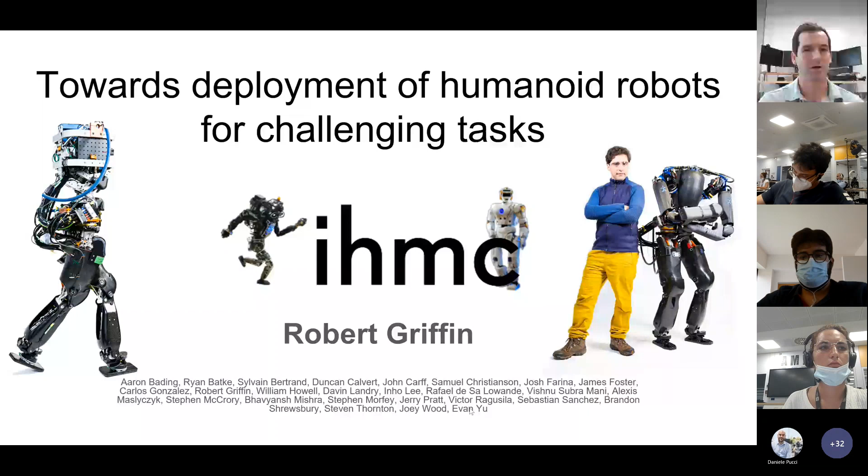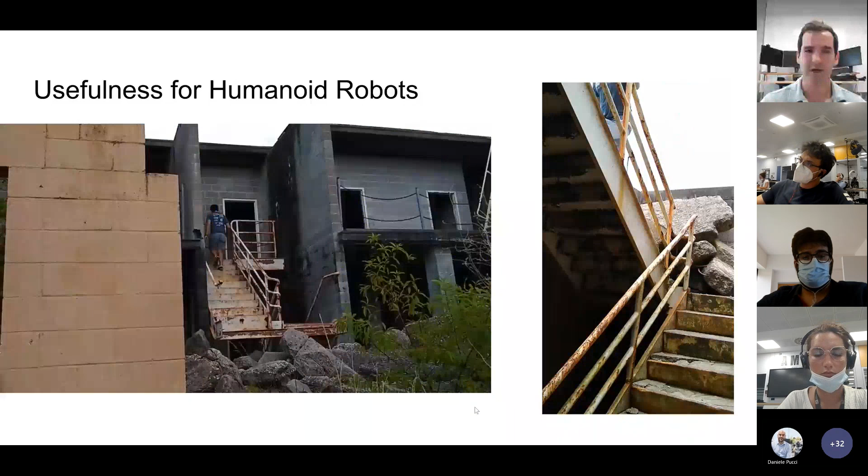I know a lot of you also focus on legged systems, so this justification may not entirely be necessary. But when I think of humanoid robots, I think about what kind of tasks and operating places do we want them to be in. This is me recording, going over rocks and debris at the Camp Lejeune Marine Corps base in North Carolina. We were there for a project with the Army Research Lab a handful of years ago.

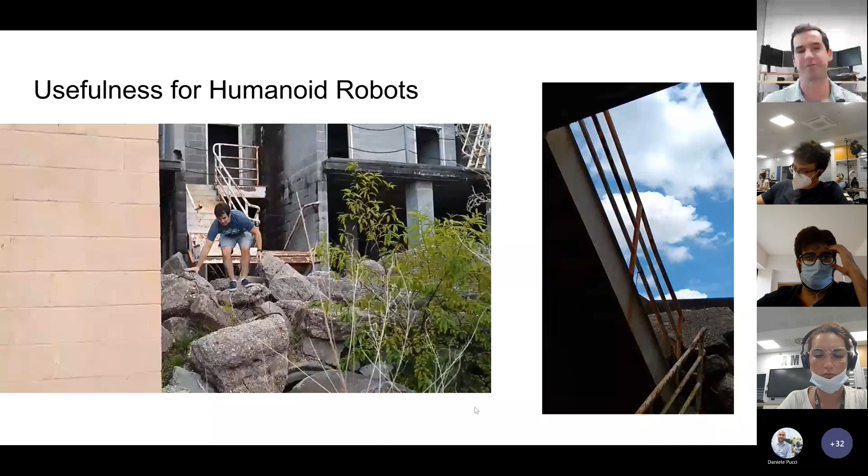I really don't think this is a task that could be accomplished by a ground robot that didn't have legs and hands. Other tasks you can look at - we comically call this a traditional disaster area, which is actually Jerry Pratt's garage. Here the user has to climb over all kinds of different things. You have small support areas incrementally spaced apart. Sometimes they need to use their hands for balance, and there's a lot of these tasks involving retrieving objects.

There's just a lot of these tasks that would be extraordinarily challenging, if not impossible, to accomplish with more traditional ground robotic systems. That's really what we're thinking about - these complex environments in an urban setting where robots have to go through doors, climb stairs and ladders, squeeze through tight spaces like this crawl space in the bottom left, as well as go over rubble and overcome barriers.

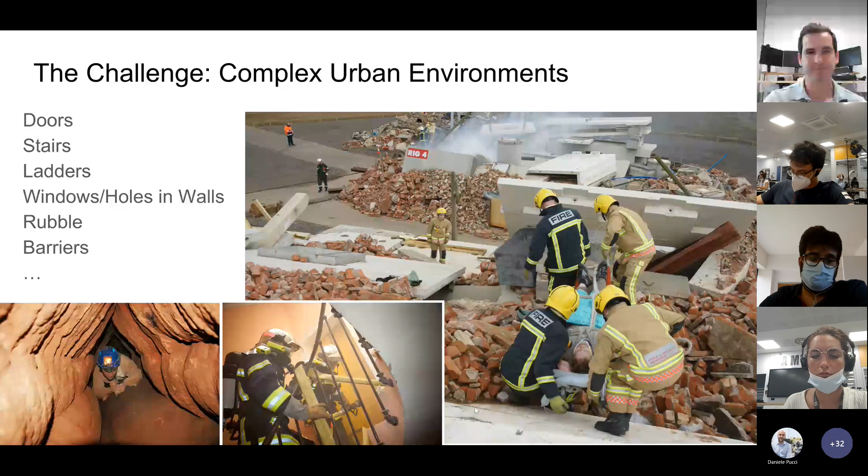And that's our whole thesis statement: humanoid robots can do what people do. I can reach a high object, so can a robot. I can squeeze between tight spaces. I can climb stairs, go over stepping stones, and over obstacles pretty easily. If I compare this to more traditional ground platforms and even quadrupeds, a single platform with two legs is a lot less constrained in terms of the variability it can accomplish.

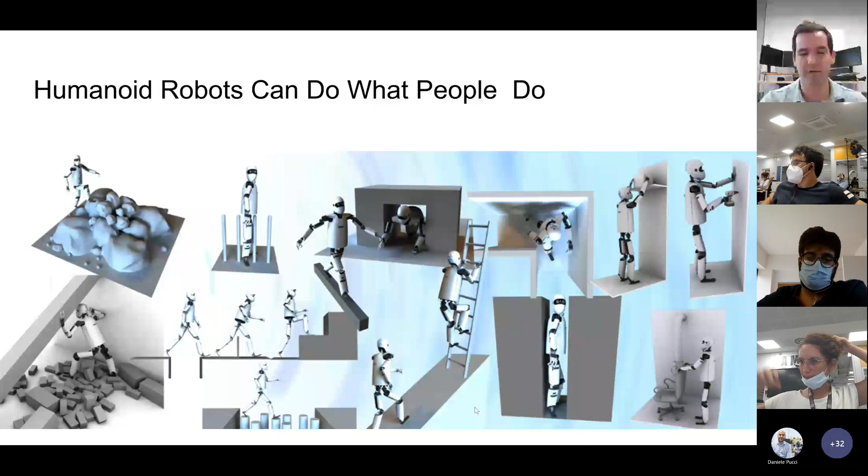Tracked and wheeled bases, looking back at these tasks, couldn't accomplish a lot of them, particularly given a finite size. If I want to go over big obstacles, I need big wheels. If I want to climb stairs, I need big wheels. But if I want to squeeze under something low, I need a small platform. Quadrupeds are still somewhat limited by their form factor, whereas a human has a very different profile if you turn sideways, and your feet only need a place to step about every meter, so you can go over pretty much any terrain.

To that end, we've been trying to design our own new humanoid robot. The biggest reason for this is we really want to operate at a human tempo in relevant environments. For a long time, our research has been really constrained to a lab setting.

I think that is the same for most of us. Although I know people like Claudio in the audience has actually taken his robots out into the real world, much more so than we have. But...

We really want to be able to have robots that are faster, lighter, have this high range of motion, and an equal level of reliability. We've been operating with our Atlas and Valkyrie robots since the DARPA Robotics Challenge, going on nearly 10 years now, which is kind of incredible to think about. We also want to just see, how flexible can we make a platform? How fast and strong can we make this system?

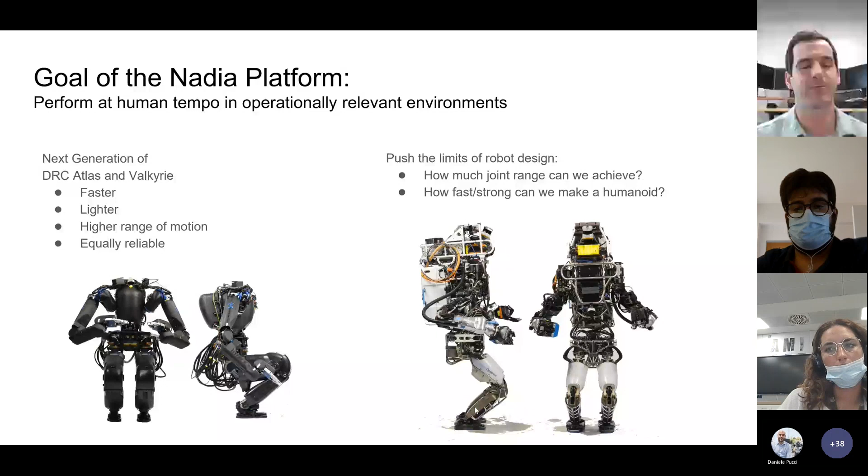To that end, we've spent the last handful of years designing Nadia. We really started exploring designs in 2019 and putting together prototypes. We used this rapid iteration methodology where we wanted to test different joint mechanisms in plastic as opposed to metal, so we didn't have to commit to a design too quickly, because printing or cutting metal is both time consuming and expensive, whereas printing plastic can be done relatively quickly and cheaply, which allows us to iterate fast and test different designs without committing to anything.

So after about 16 versions in 2021, we decided to actually start manufacturing. We found something we were happy with. We started to manufacture the robot, got it assembled around summertime and walking. Then around March of this year, we finished building our upper body, which we attached to the robot here.

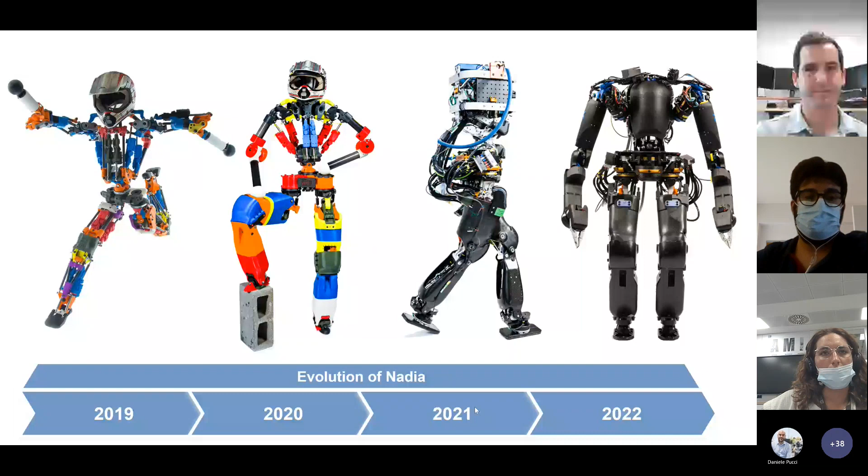So Nadia, as it is now, is kind of this mix between electric and hydraulic actuators. We have 6 degree of freedom legs, 5 of which are hydraulic and 1 electric. Then we have a 3 degree of freedom spine, 2 hydraulic and 1 electric, and then 7 degree of freedom arms, which I'll dive into the design aspects of here in a minute.

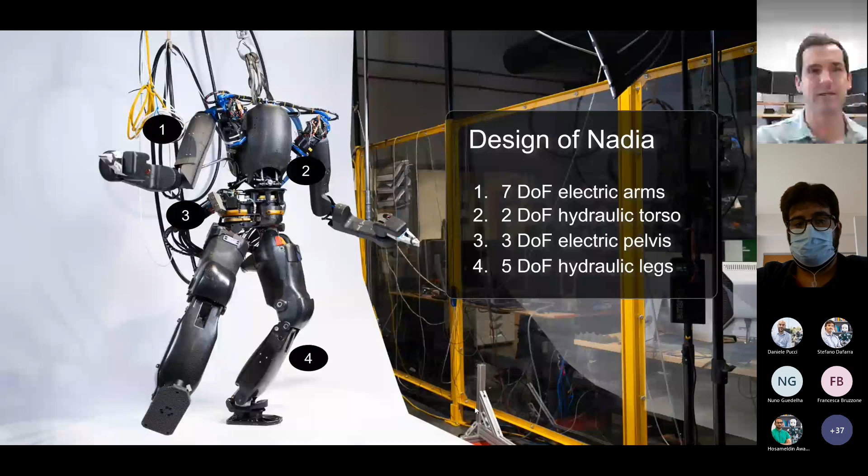Now, one of the big things that we did, apparently right now - for hydraulics, this is the integrated smart actuator developed by Moog, also in collaboration with you all at IIT, specifically the HyQ group. One of the reasons we were really focusing on these hydraulics is there's not an electric actuator that we have found that has the same power density as a hydraulic piston.

It's also nice because instead of having to put all this copper where you want the power, you can move high pressure fluid to where you need it. So you can amortize and recenter where a lot of your mass is. If you put your HPU of your robot into the chest, I then don't need all that weight in the legs. And once I have a good HPU, I've already paid that cost - I can basically use hydraulics throughout the rest of the robot.

So as you can see here, we're really using the same piston or actuator throughout the robot, which has some costs I'll go into later. But we chose that because if you look at these curves, it's the only thing we were able to find that even comes close to hitting the actual power curves of a human being. The best electric we were able to find is this blue line down at the bottom, which doesn't come close to the hydraulics.

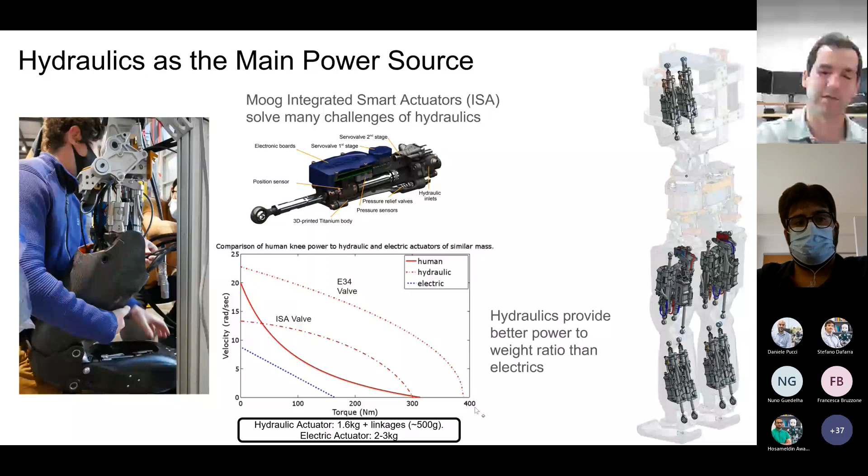We also do this carbon fiber exostructure for the robot. The idea here is you can have this large moment of inertia or modulus of elasticity - I can't exactly remember - but you put all the mass radially out in the carbon fiber, so you get this really stiff link. In addition, it protects all of the internals, as well as potentially allows the robot to make contact with most any part of the body, which is really something humans are capable of.

We have this soft structure that allows those interactions to be done easily, but also, if I can lean against something without using my hands or feet - that's a real direction we think humanoid robots need to push in order to be able to operate in these kind of environments.

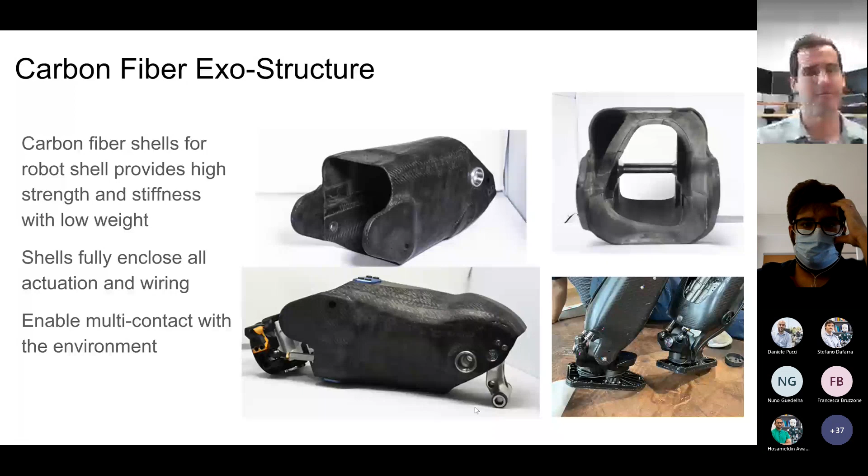We also designed these commercial off-the-shelf arms. This was pretty much - we were running near the end of our project and we needed arms, and this was a quick solution. And it's worked pretty well.

So we have these, we just used T-motors off the shelf and then carbon fiber tubes with a couple of metal cut linkages in there. And with that, we're able to get this long arm as well as a massive workspace due to the range of motion of the joints themselves.

We had looked at using these planetary gear box actuators that we developed for the pelvis, but just the size and expense of them and the time that it took to actually get the gears manufactured was a little bit prohibitive. So we've been using these arms on the robot since then.

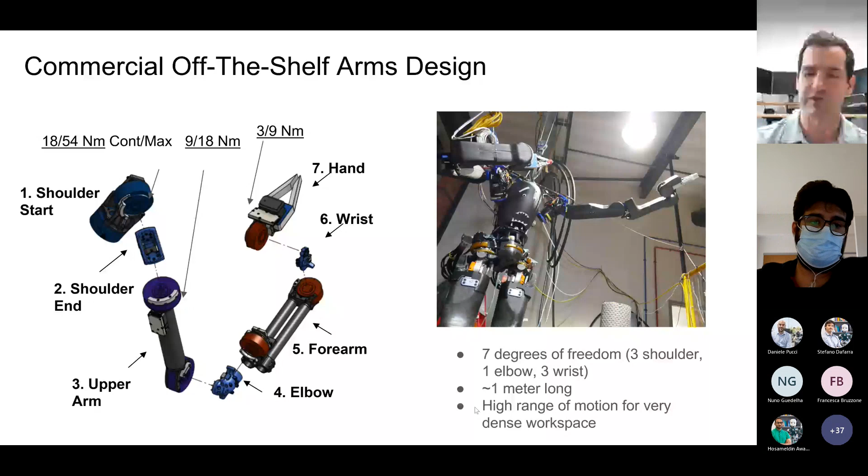With that, we've been able to achieve some, we think, quite great performance when it comes to range of motion. You can see here the robot can lift its knee pretty high, and this isn't really exploring the full range of motion of the pelvis. When humans lift their feet, they're able to tilt their pelvis in order to get this really high range of motion out of it. We're not really doing that here, but we're still able to make really high step ups, as well as the robot can touch the ground pretty easily, and that's without using the spine or bending the pelvis as far forward, like a human would do.

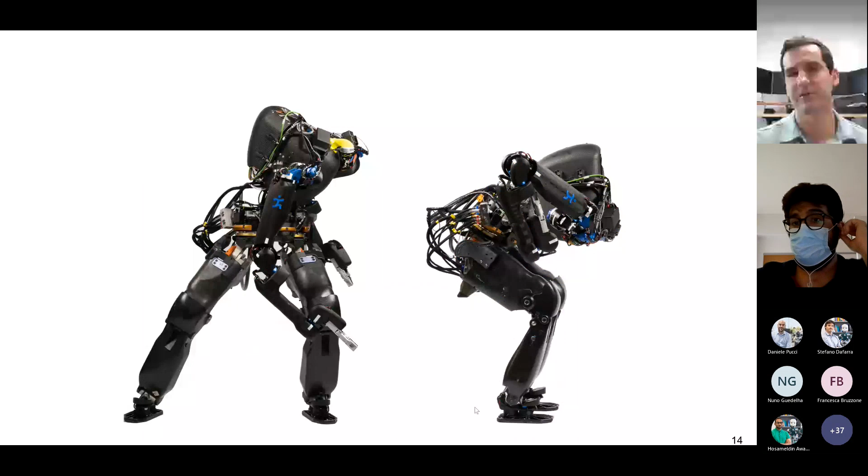We can also do that kind of a lean, as you see here on the right, as well as get really wide stances and move the robot's center of mass around.

Then when we do this kind of comparison to the Atlas robot that we have, you can just see the shoulder height is pretty comparable. The hip height is actually, I think that's not a perfectly scaled image on the top left, but the hip height is slightly higher, and that's because of the size of our hip mechanisms. But because of those hip mechanisms, we're able to get a much wider stance, as well as actually really do crossover steps. Atlas can just barely put its feet one in front of the other, but Nadia can completely cross over, and we think that that's going to open up a lot of possibilities when it comes to step adjustment.

When you compare this height that the robot can actually step up, Nadia is able to step on top of these 4 cinder blocks without really having to cheat. Whereas Atlas here, the cinder blocks are not directly in front of it. It's having to heavily roll the foot outward in order to reach that same foothold.

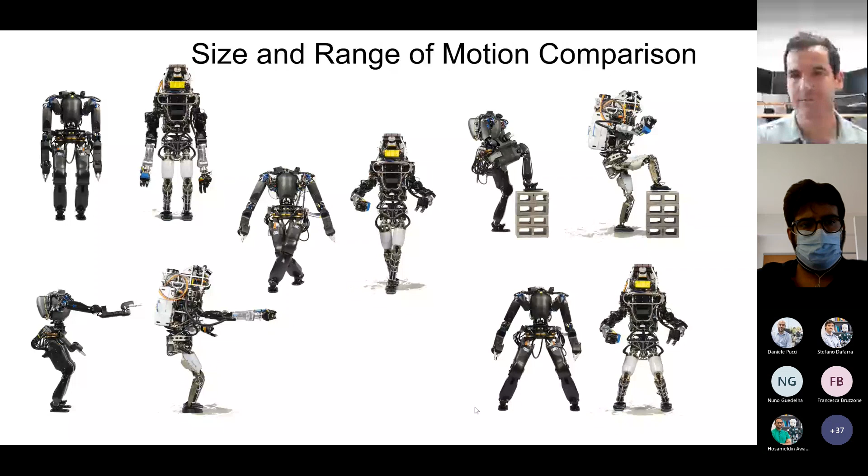And this enables a lot of tasks that the user can directly tell the robot, step here, here, here, here, and it can navigate through these really complex environments. So this is kind of the architecture that we were centering around for Nadia. And this architecture is really based off of using these reduced order template models.

So in this case, we're looking at inverted pendulum dynamics, and specifically this concept of the capture point. If you're not familiar, this basically is saying, okay, well, I think I can model motion of a biped as an inverted pendulum, where you basically have the base of the pendulum is the foot down here at the bottom, and specifically the center of pressure within the foot. Then the end of the pendulum is the center of mass. And then we can assume that it's a point mass, or we can have a reaction mass here to actually generate angular momentum. It doesn't really matter in this case.

But the big assumption is that you assume constant height. So the center of mass is moving in this plane here at some kind of fixed offset from the ground plane, where then the leg's able to extend and retract in length. And when you do this, you can then kind of define this, we call it the instantaneous capture point. It has a couple of other names in the literature, like the divergent component of motion, which has been championed by both the Asimo team as well as the group out of DLR by Johannes Englsberger, as well as the extrapolated center of mass from the biomechanics literature.

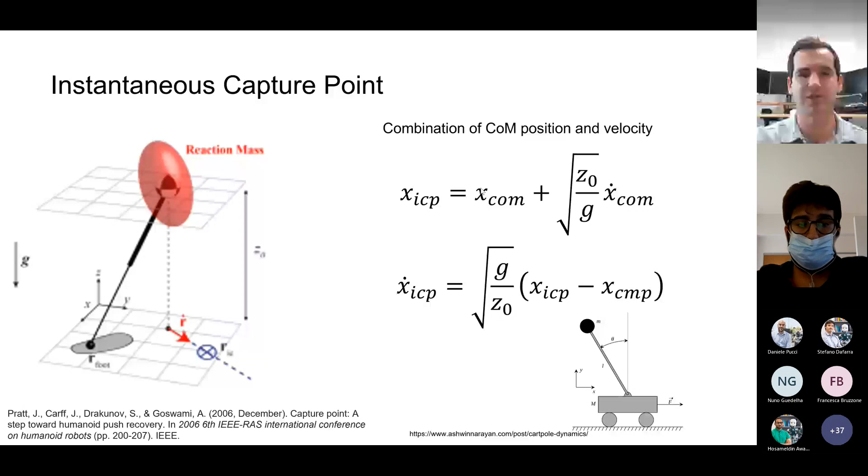The big goal is, we have an operator off screen with a joystick controller. From that joystick controller, we're computing desired footholds in a thread and sending them to our walking controller, and it just assumes a constant velocity. Here the velocity heading is constantly changing, so the plan is constantly changing, but we're able to achieve really good omnidirectional motion, whether it's backwards, forwards, or side-to-side walking.

This has been really great, that we're actually able to start having relatively good locomotion, not incredibly slow like Atlas. Sometimes you'll watch our Atlas and it's moving what appears to be quickly, and then you walk next to it and realize it's depressingly slow. But that's not really the case with Nadia. So that's been pretty exciting to move into that direction.

Kind of the next big thing is we want to build in this kind of dynamic stability to the robot. We don't just want it to be walking with fixed footholds, because that really limits the stability of the overall system.

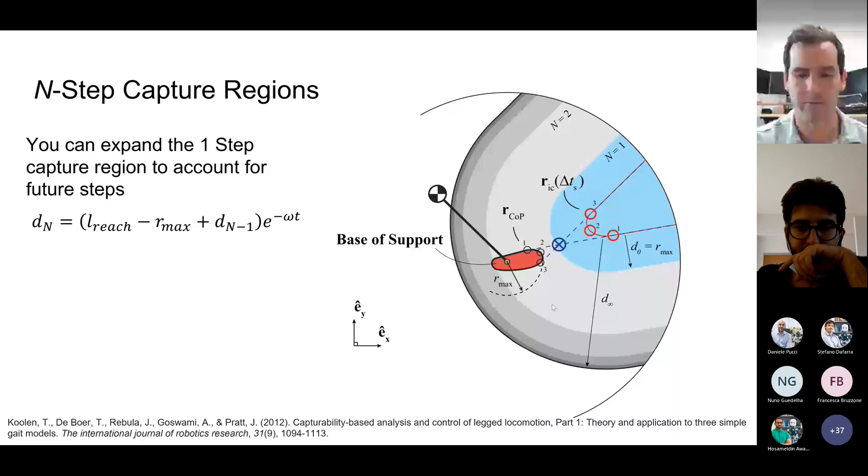One of the underlying assumptions of this, though, is that you can step anywhere within a circle. You see this black circle describing where the robot can step in the world, and that's not true. If this is my right foot, I can't step directly on the other side of my right foot, particularly with a robot like Atlas, but also a robot like Nadia. This means that my reach in this expansion, this underlying equation, is wrong, so I need to take this into account.

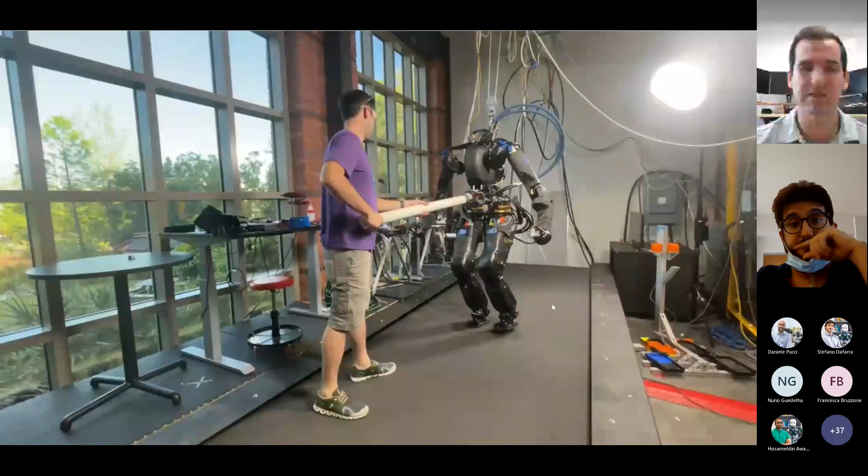You can actually do that by looking at your reachable set and expanding about that. And when you do, the robot, using this capture region approach, gets a pretty robust response. We were pretty happy with this. Here's me pushing on it with a boxing glove attached to a PVC pipe, which is a finely tuned instrument that we developed here.

One of the big challenges about this, though, is I'm having to be really careful when I push the robot. It's really sensitive to the actual timing of the disturbance, just based on a couple of things.

Mainly the fact that if I have this really long transfer duration, if I don't push the robot right at the beginning of swing, I'm probably not going to be able to recover from it well. Even with a 0.5 second swing, if I add just 0.2 seconds of transfer phase, the area of my capture region gets reduced dramatically. That 0.2 of a second is extremely important.

That has to do with the exponential relationship between where the capture point is in time, coming from the inverted pendulum. So I can treat my capture point location as a phase variable and ask where through my dynamic plan I am. If my capture point is at the very beginning of the plan for transfer, my phase variable is at 0. If it's near the very end of the plan, my phase variable is at 1. Somewhere in the middle, it's about 0.5.

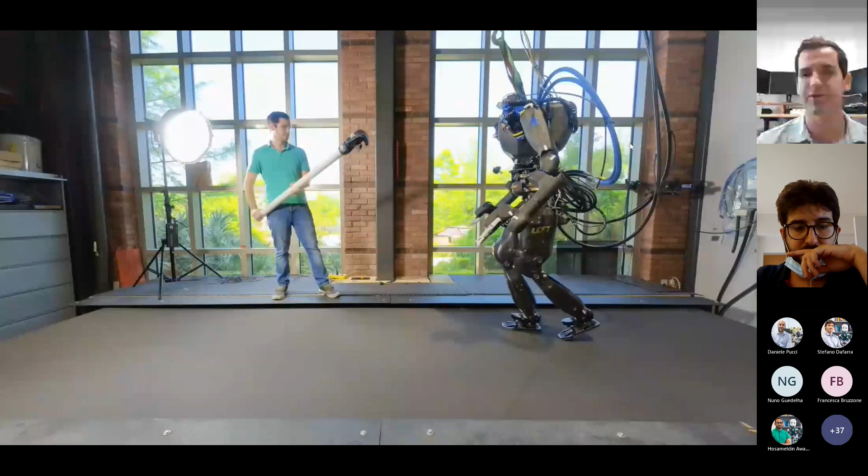When I do this, you're able to get much more robust disturbance handling, where I'm not having to be as careful as to when I'm pushing the robot, because it's able to basically terminate transfer early and then take quick swings as necessary. So it deviates from the prescribed nominal timing as it sees fit based on the capture point conditions, the capture point state.

And this has been really great. I'm able to push the robot relatively hard. It's not incredibly hard, because it still doesn't have knowledge of anticipation. It doesn't know that it's going to get pushed. This is purely reactive behavior. Whereas I think people are really good at leaning into a push that they see coming, this doesn't have that capability. It's having to rely purely on reaction.

One of the next things is, one of the disadvantages of just having the one size of SEA actuator that we have is that we have these really heavy legs on the robot. We have all this mass in the shins, which means you have all this distal angular momentum. It's completely oversized. We get about 900 Newton meters of torque at the ankles, which is incredible but also completely unnecessary. Because of that, we can't just treat it purely as a point mass, because we're swinging these feet relatively quickly through the world.

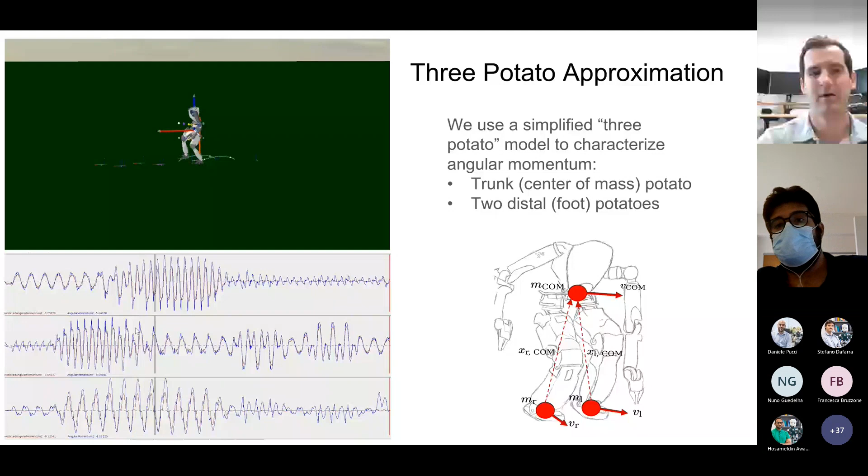To address this, we can use the 3 potato model, where you have the trunk, which is 1 potato, and then you have these 2 foot potatoes that have a small amount of mass in them. One of the problems with this is it's not incredibly accurate. If you look at this plot here, you can see that the blue lines are the actual angular momentum of the system, and the black lines are the estimated one from this 3 potato model.

So there's a lot of nuance of the angular momentum that the 3 potato model misses. To compensate for that, one of the things we're looking at is to actually learn a residual model. So take this data - we have a really accurate estimate of the angular momentum itself, we know the foothold, we know the leg trajectory - what would the resulting angular momentum actually be? Then you can learn that delta to make the 3 potato model predict correctly what the actual angular momentum of the system is going to be.

In this case, you still have the underlying parameterization of the 3 potatoes, so you're just learning that residual. We're pretty excited about getting this to work. On the robot, we've noticed a few issues we're still trying to iron out, but I think this is a good path forward for a lot of it, because it really does make the correction correct, whereas it was qualitatively close but not quantitatively. Now it is both qualitatively and quantitatively accurate.

One of the other big things we've been pushing into is thinking about multi-contact. We've been designing operator interfaces to allow a user to both specify contacts in the world that the robot has, as well as manipulate the body through different poses in that configuration.

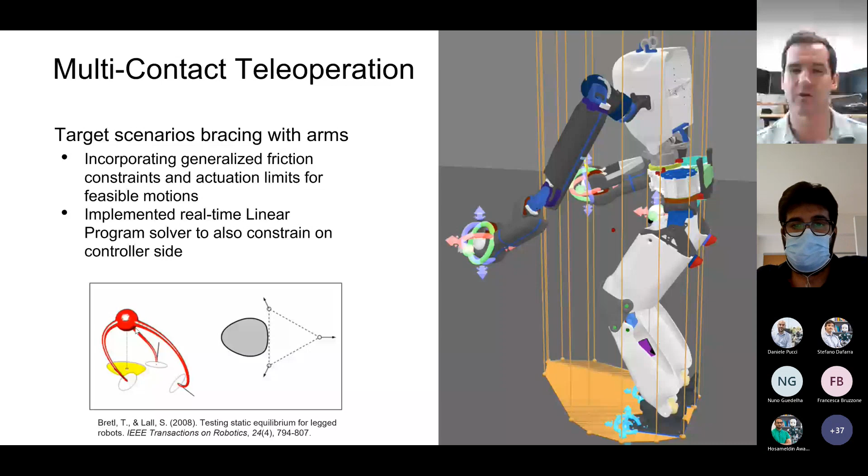In doing this, we can load from a JSON file and manipulate the robot, and you can see what it's capable of doing. This really opens up a lot of the advantages of a humanoid, and the fact that the robot can now lean much further forward to reach objects that would otherwise be completely inaccessible, really improving that workspace.

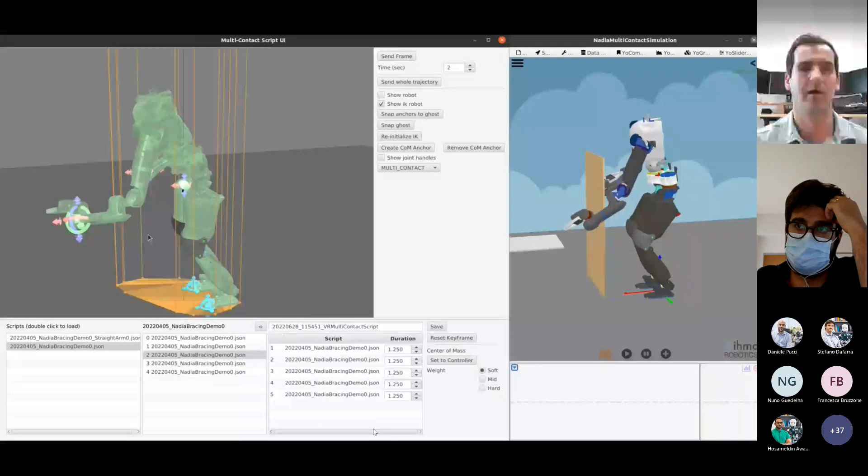The workspace in Nadia is great with the arm as it is, but you have this floating base, you should use it. One of the other big areas of work we've been working on is adding this kind of user-driven automation to the robotic system. This comes out of our work in the DARPA Robotics Challenge.

In there, we came in second in that challenge, and we had an hour to accomplish relatively basic tasks. You can see here the breakdown of that hour, where the robot was only moving 35% of the time. The rest was spent with the operator figuring out the exact commands to send it, trying to localize in the world where the robot is, getting situational awareness to direct the platform correctly.

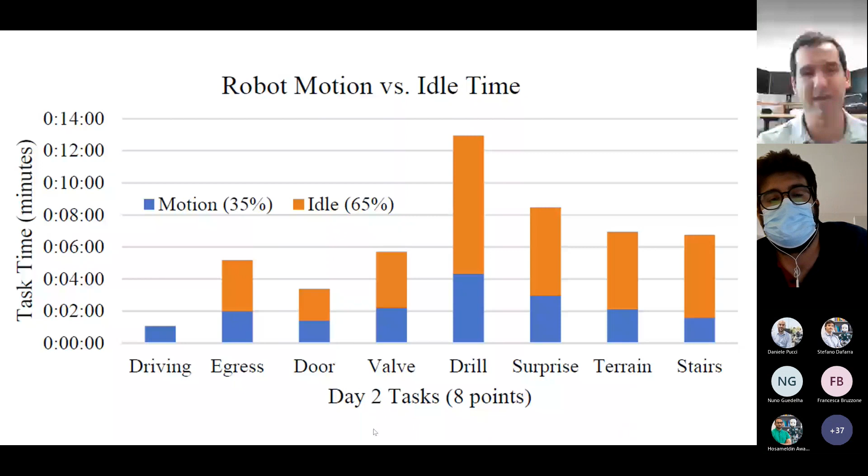So the idea is, if we could cut down that idle time and have the robot continuously moving, you can now have a robot that moves three times as fast as it was able to move before. To that end, we've been exploring this kind of semi-autonomous behavior framework.

Here we have a mocked up task, an exploration for bomb recovery. A user drops a position to navigate to on the other side of the cinder block field. The robot walks over, sees a door. The operator indicates, yes, open the door, and it automatically executes a parameterized door opening routine. Then it notices debris in the way.

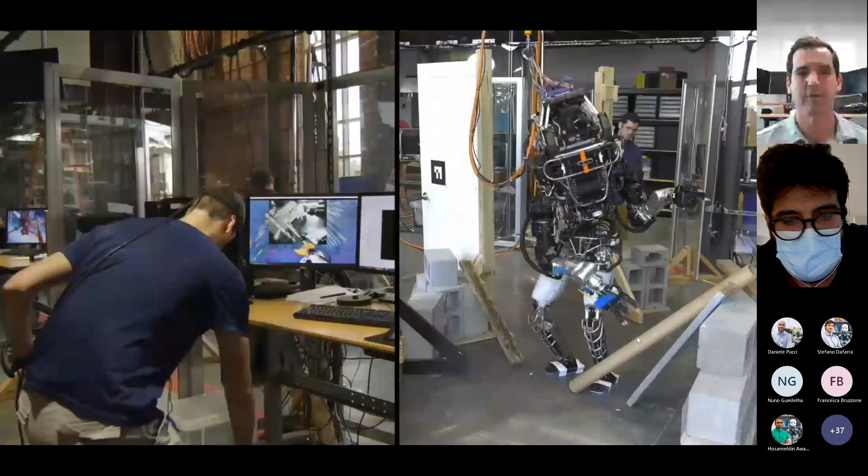It's not really able to reason about how to clear that, because the debris could be in any configuration. So we have a nice virtual reality operator interface that allows the user to go in and move everything out of the way. You can then hit resume, and the robot goes over, notices the push door, and executes the push door routine.

Once it's on the other side, it sees these stairs, and the user says, yes, climb those stairs. For this one, the robot has to build up a model of the stairs ahead of time. It executes a handful of the steps, then proceeds to the next task. This is sped up at about 10 times actual speed.

When it gets to the top, it jumps back into VR, and the user is able to recover the bomb, then it goes back down and you dispose of the bomb.

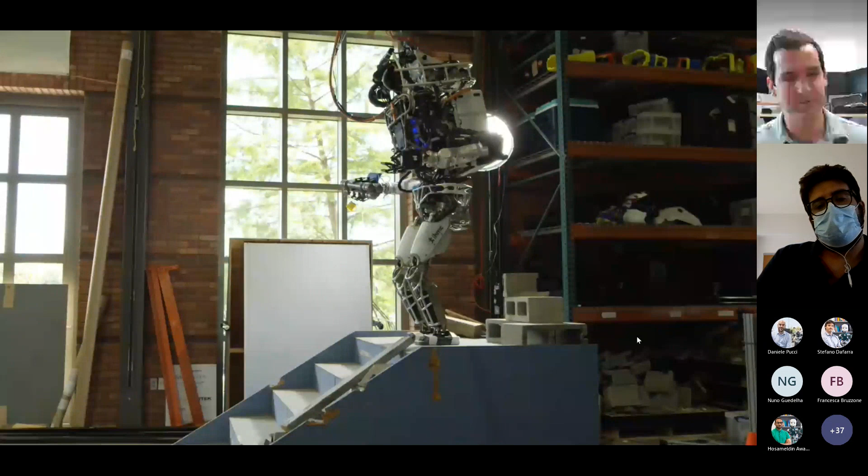To do this, we've built up quite a few different tools to make this possible. One of the first was modeling the environment as planar regions. This gives you a nice convex approximation of the environment that's both data efficient and mathematically efficient, because you can use convex tools for your planning.

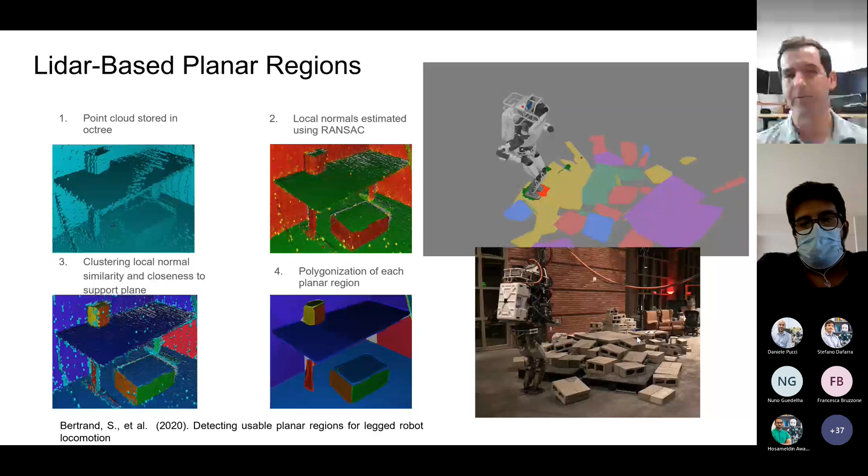The problem with this approach is it takes a little while. We have this spinning Hokuyo single point scanning LiDAR, kind of a relic of the DARPA Robotics Challenge, and it takes about 20 seconds to build up a fairly accurate model of the environment.

To address that, we've been exploring the use of depth cameras. In this case, it's a time-of-flight camera, or solid-state LiDAR, where we can punt the computation onto the GPU, and we're able to get computation times of about 250 times a second, way faster than the sensor speed, which is fantastic. We're able to get these planar regions in real time, just with a relatively limited field of view.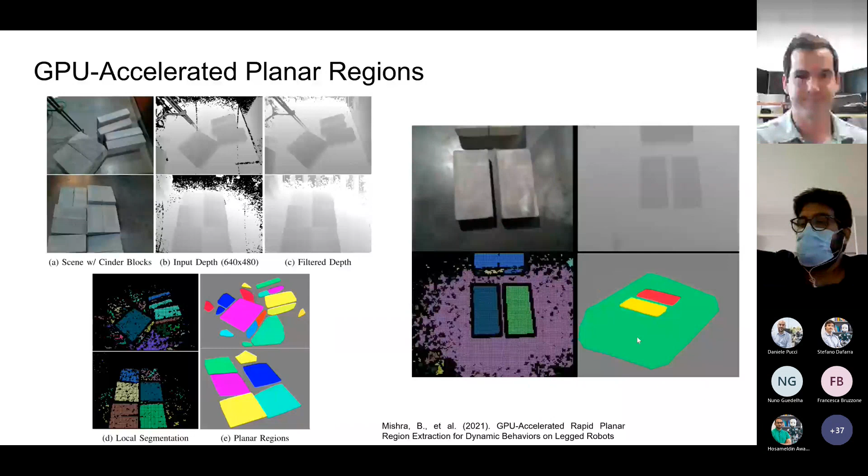To that end, we're also looking at extending this to multi-line scanning LiDARs, taking in these kind of unstructured point clouds and getting big planar regions out as obstacles and things to actually be able to localize against, which is something we're pretty excited about.

This represents a really efficient data structure, as well as a really informationally dense data structure. You have large flat regions with nice surface normals. If you feed that into this factor graph approach and add in these planar region factors, you can come up with a really nice SLAM system.

Next, we can feed these planar regions into just an A-star based graph search algorithm. Here, we are discretizing the world as this 2.5D dimensionality graph, and then we can snap the footholds using just some really simple convex geometry.

And we can then just have a user say, walk to this goal. In this case, I placed a goal on the other platform, and the robot was able to come up with a footstep plan to cross this balance beam. And then I also just placed a goal on the top platform.

We did this during the open house, where we did this run for about 30 minutes, just going up and down. From there though, we really need to also be able to have this kind of long distance LiDAR.

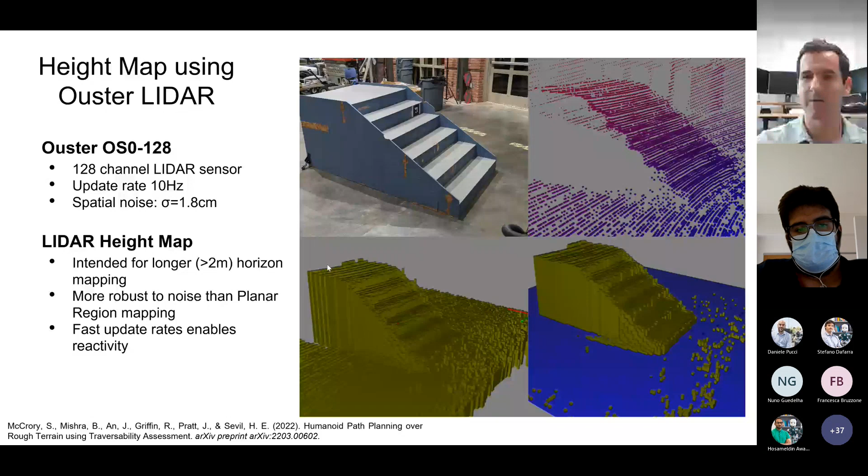To that end, we can build up these height maps using our Ouster, just using a pretty basic height map algorithm, and then you can do an A-star search for path planning.

One of the things we did for this was a two-phase approach, where you come up with your basic path where you have this traversability estimate of the environment. Then you can smooth the path in order to try and increase that traversability as you go along, as well as do things like pushing you away from the edges of the stairs.

A lot of traditional approaches we noticed would kind of hug these edges, whereas that's really not ideal for a humanoid.

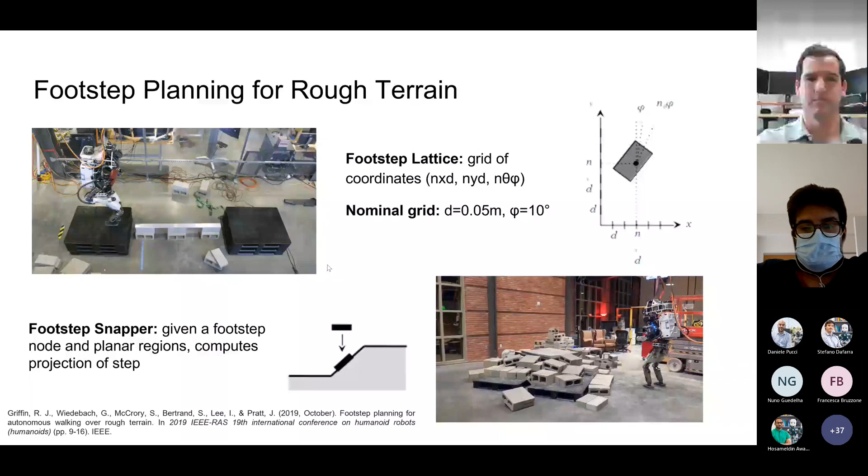Then you can couple all of these different algorithms together, where you have a height map, then a body path, and then in real time you can actually be getting these rapid planar regions in and planning footholds in this kind of look and step behavior, where the robot is just looking at the local environment and figuring out where it needs to step in order to reach a goal.

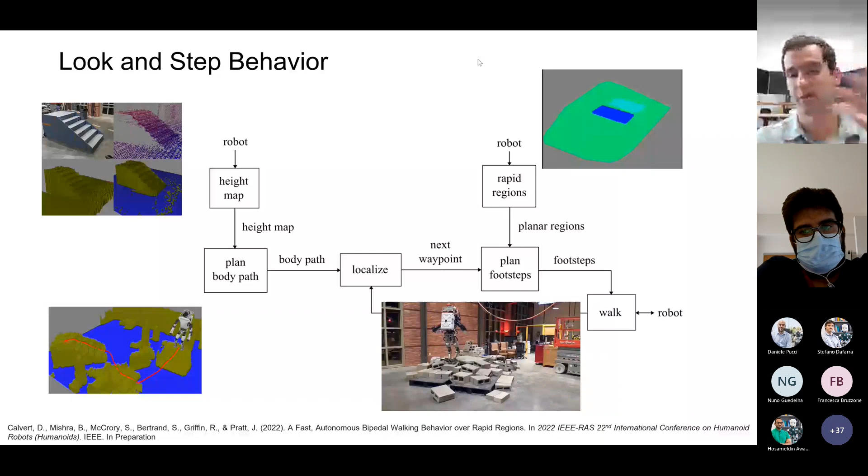When you do this, here we've placed a goal on the other side of the room, and the robot's able to, as it receives these new planar regions, request a new footstep plan from the footstep planner at every step increment. The robot's able to then relatively quickly, or as quickly as Atlas can, walk across this terrain.

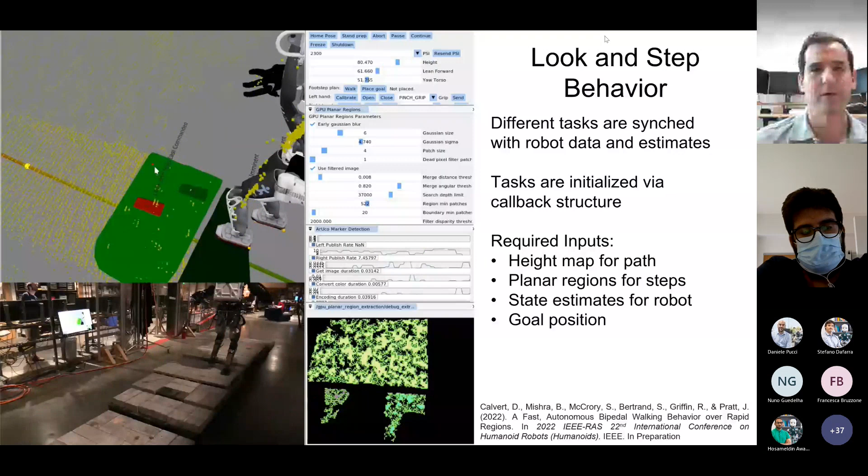And we're pretty excited about this, because this allows us to do a lot of fun things like react to these kind of dynamic environments.

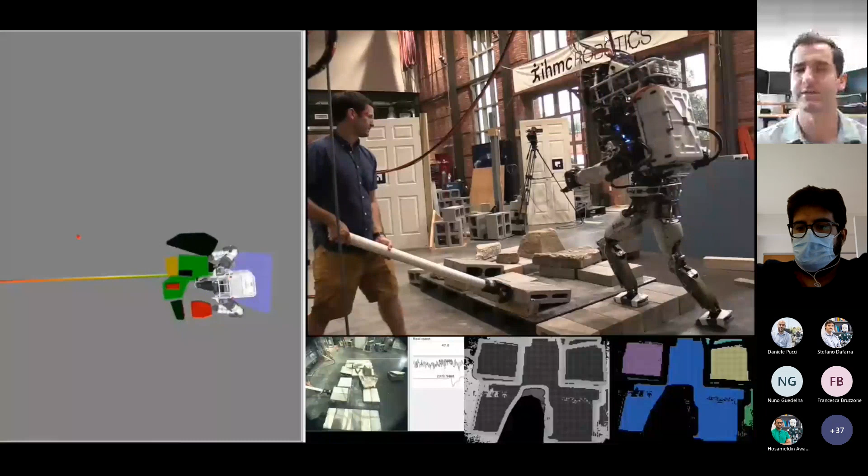So you can see here, again, we've placed a goal, and the robot's coming up with these plans. I can shove things into the way, and because it's getting these environment models so quickly, the robot's able to replan and react to these environmental changes.

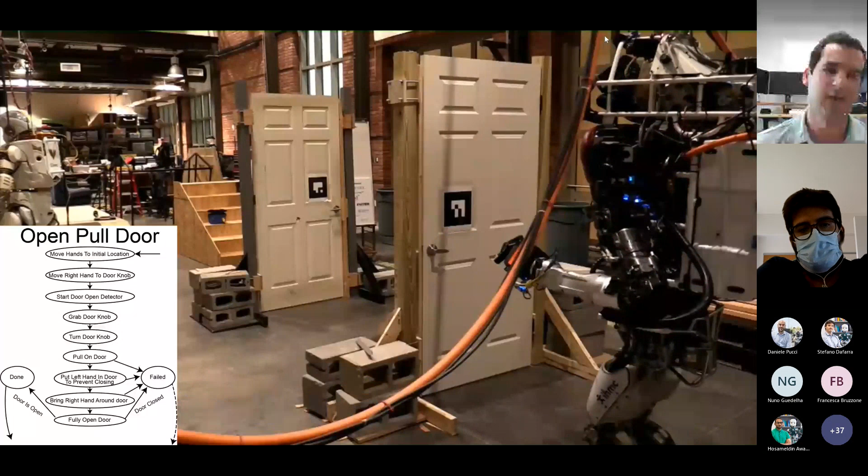For the door behavior, we've used a relatively structured architecture where we have a set of individual tasks that are parameterized by the door. We are having to kind of cheat and use these QR codes. We're hoping to replace that with object recognition in the near future.

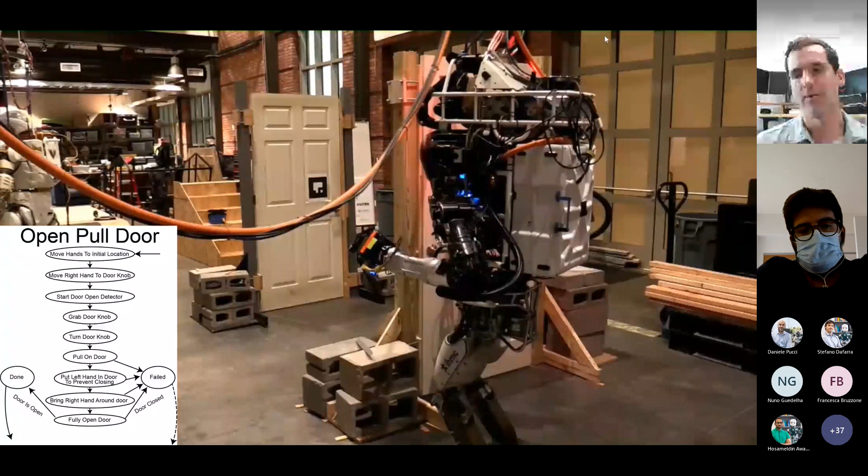One of the things we do here is we've tried to design the actual sequence of tasks in such a way to create really reliable execution.

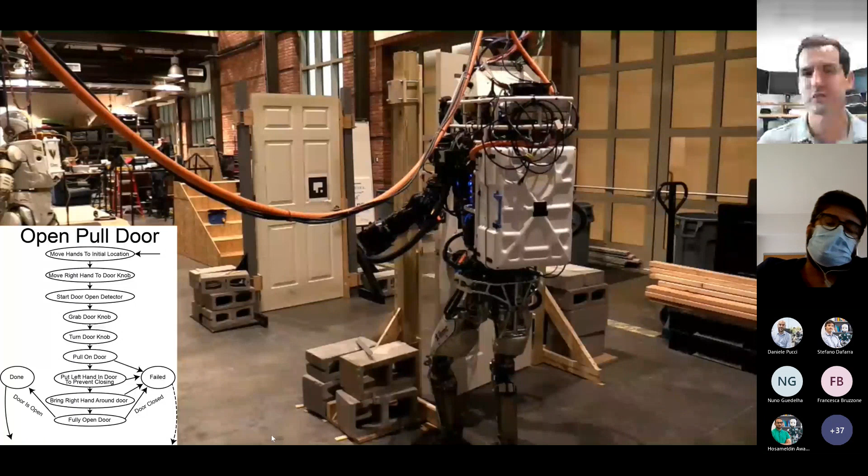You'll notice here in a second that once the robot actually opens the door, it then puts the other hand between the door frame and the door to prevent it from being able to shut it. This is kind of in response to the arms on Atlas not being exactly the most accurate.

And then the spine also, you can kind of see even as it's opening, the robot's yawing a little bit about the spine, and that has caused it to shut the door by accident in practice. So by putting the hand in the way, that doesn't happen.

Then because it's so big and it's moving so slow, it has to kind of wrap the arms in front in order to make it through the door frame.

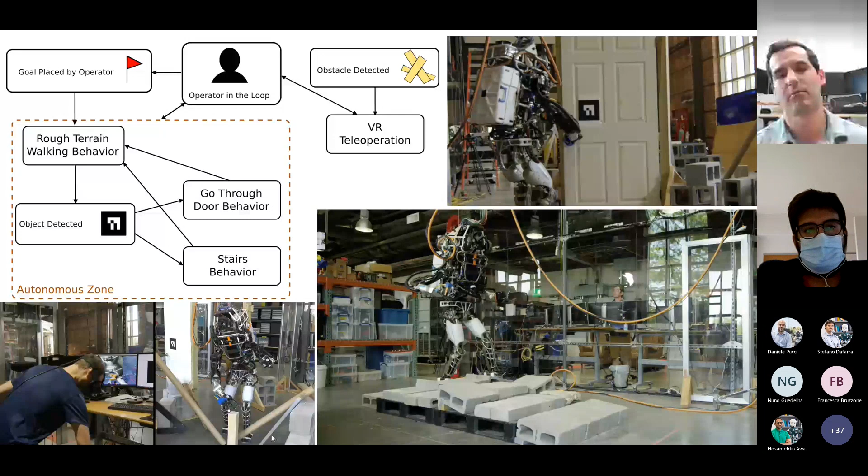From there, in order to accomplish that task we showed earlier, you can come up with an overarching behavior architecture that coordinates all of these different sub-goals and sub-behaviors, including real-time interrupts like obstacle detection, goal placement, and object detection. We call this our operator or explore environment behavior, and we're using this concept of interdependence to figure out where the cues are that we need to increase reliability moving forward.

One of the other behaviors we've developed, as an exercise in algorithm integration and sensor fusion, is this idea of person following. We have a neural network that segments the environment into different objects, but we're really only interested in the mask that describes a person, so we take that one person and say, follow this one.

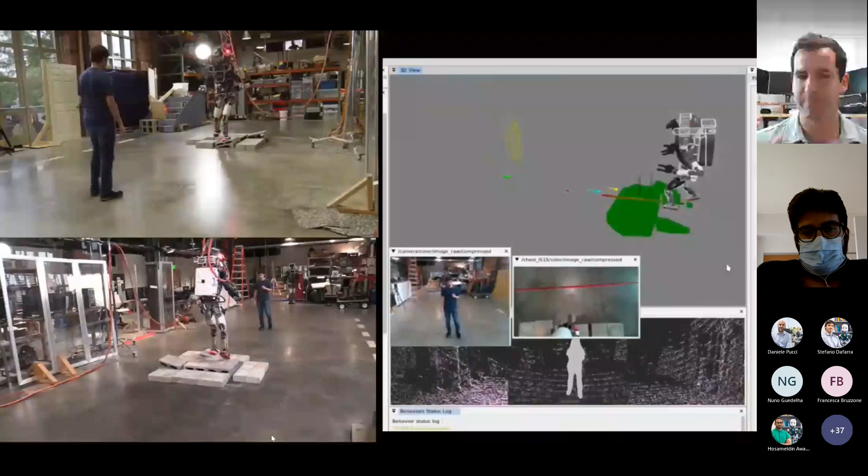You can then project the point cloud into it, so now you have a semantically labeled point cloud. For every person you can define a new track that gets tracked throughout the environment using a Kalman filter projection, so even when the person goes out of frame of the robot's cameras, the robot still knows where they are and can follow them.

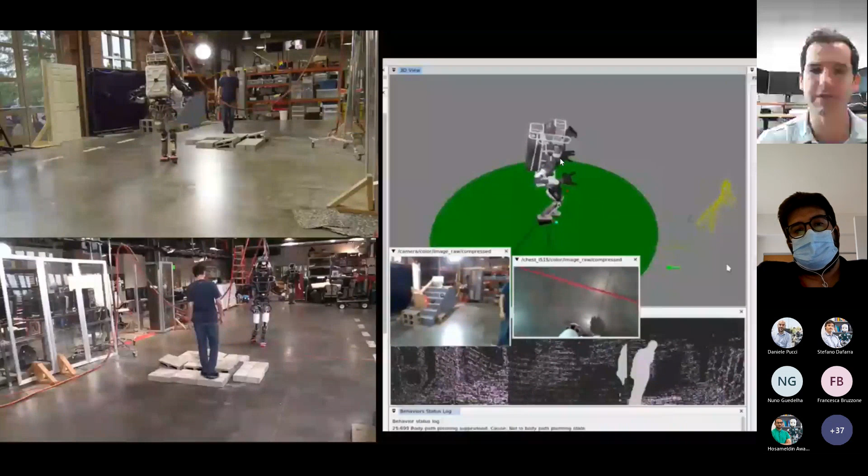You basically have this defining a standoff distance, which you can see as the dot in the top right, which is then fed into our look and step algorithm. So the robot is actively following the person through the environment, including over this rough terrain.

One thing we've noticed, if we assign hypothetical reliability percentages to the different behaviors required to execute this explore environment algorithm, is that when you start combining all of these, even if individual tasks are pretty reliable—like a 99% approach door execution behavior, with a minimum around 80%—the combined total reliability of the overall behavior is really, really low unless you have some ability to recover. So 37% is unacceptable.

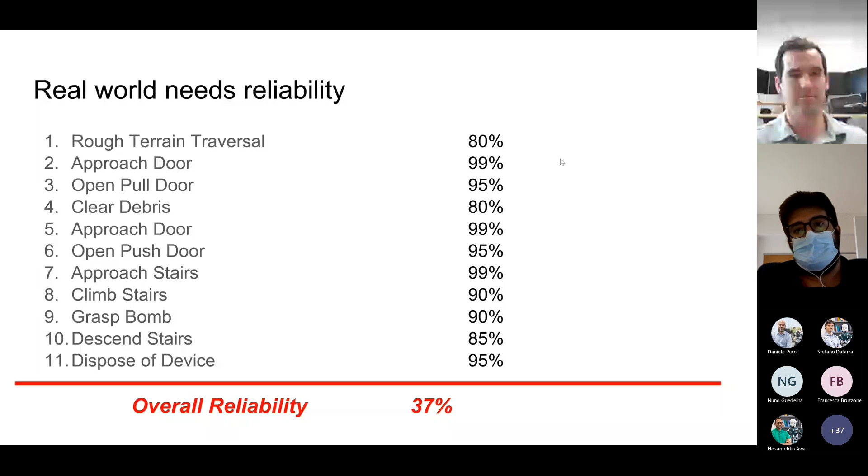99% is really acceptable. So how can we, and this is just a law of statistics, basically increase the reliability? We think the key here is to have quick operator intervention.

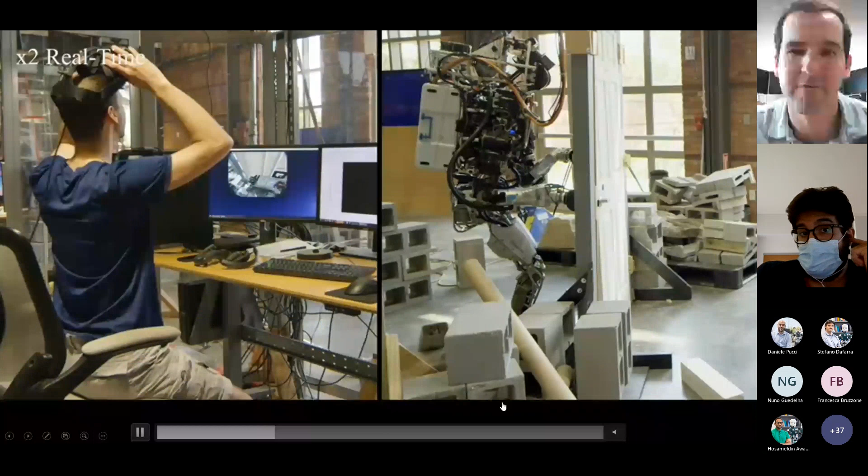Have a robot detect failure and then a human jump in to help. In this case, the robot missed the foothold and noticed, 'oh, I was going to push myself over, I need to pause what I'm doing and I need help, I don't know what to do.' So it stops the behavior.

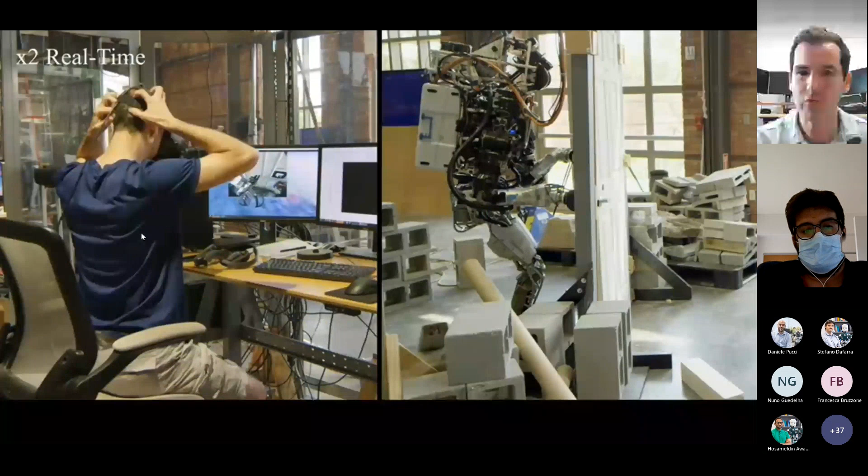John, our operator here, jumps into VR and is able to quickly move the hands through the environment, open the door, and then just clicks a button at the end, and the robot resumes the behavior. You see there, it just moves the hands and continues on. We found this to be absolutely crucial in order to increase the reliability of the overall approach.

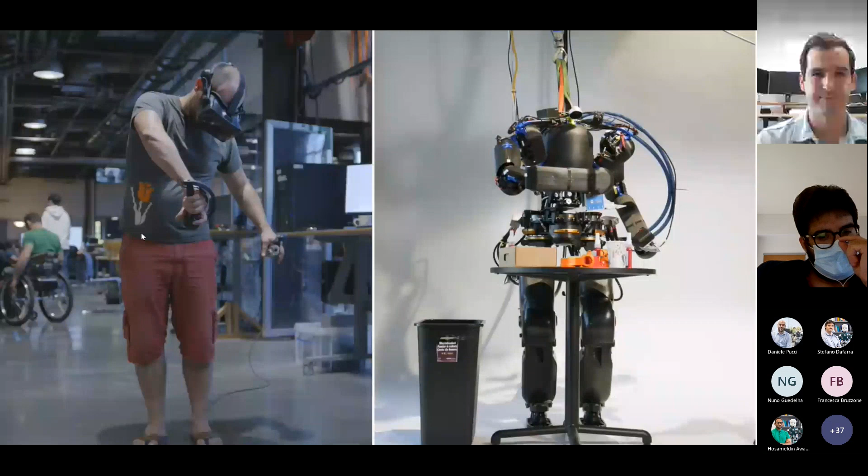And we're really excited to start tying this in with Nadia. You can see here this VR teleoperation allows you to do all kinds of things. In this case, we're moving little bottles of super glue, which requires a pretty high degree of dexterity in reality. Humans can do it really easily because we can easily figure out grasps and understand what's what from an object perspective.

You're able to really rely on your cognitive capabilities that we just don't have yet in robots. But in the meantime, by giving these really intuitive interfaces, you're able to accomplish tasks that would otherwise be tremendously difficult and take a very, very long time.

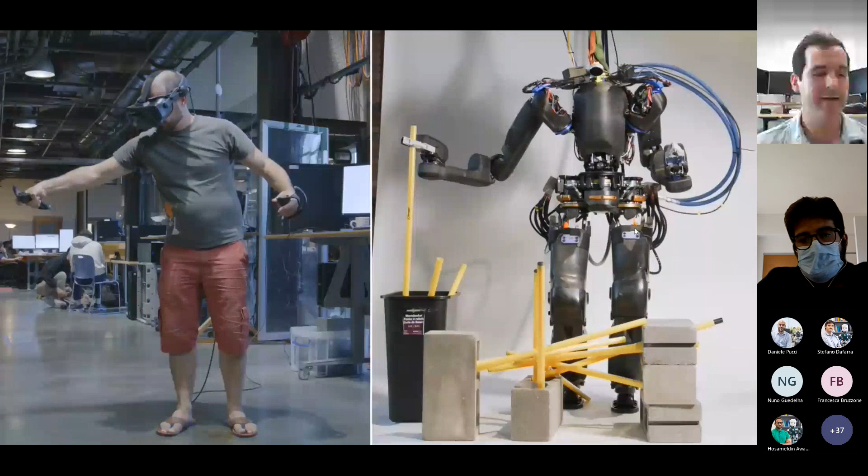And with Nadia being much faster, we're actually able to start operating at or near human speeds. With Atlas and Valkyrie, you have to move really slow in order for the robot to execute the tasks, to the point that it was kind of awkward and honestly kind of exhausting. Whereas here, Sylvain is able to move at a fairly deliberate speed, but not necessarily what I would call slow.

The biggest slowdown is just verifying that he's going to grab the thing he wants to grab there at the end. So it's kind of coupling this perception into the teleoperation feedback loop.

We're hoping to upgrade Nadia further in the near future, doing things like putting all the HPU power on board. Right now we're operating with this off-board pump, so we've been working on a test stand HPU so we can actually move this on board.

This way we won't have these hydraulic tethers and can take the robot out into the real world. We're also looking at higher torque arms, so we've developed these really nice electric actuators that we're excited about and starting to explore installing on the upper body. With that, we'll be able to move things that are meaningfully heavy.

Right now, we're limited to things like balsa wood 2x4s and those plastic sticks that you saw. We can also do multi-contact, so we can actually lean and do some of the demos we're trying to highlight. And then, to also tackle the fact that the ISAs are great - they've worked fantastically well, but they're entirely too large for our shins.

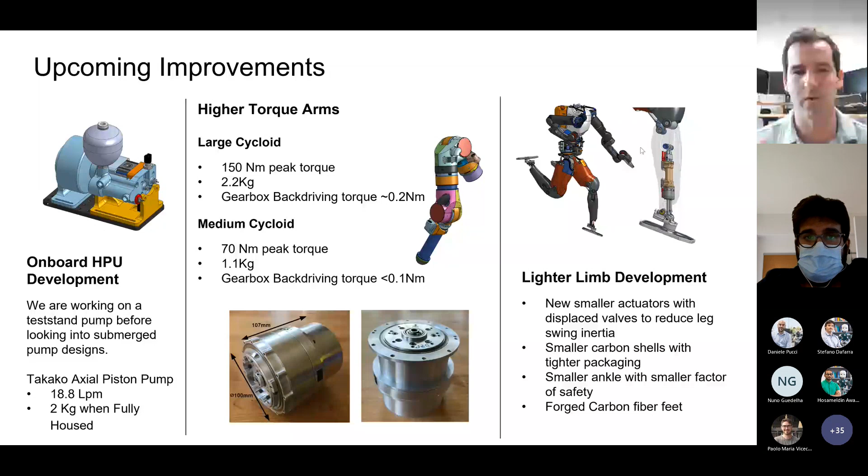We've had quite a few different partners and performers on these projects. We have a for-profit company we've spun out called Boardwalk Robotics that's supporting the Nadia development, as well as some of the commercialization of technologies. IHMC is the main performer on a lot of the projects, but we also have a PhD program at the University of West Florida where different students have performed a number of the work you've seen here.

Most of the work's been supported by NASA, ONR, and Army Research Lab. We've had some fantastic partners to help with technology development, including Moog, you all at IIT - specifically Claudio Semini's group - motor technology from Halodi, and hoses from FHS.

We have an amazing group here, a great team which we're expanding. This is actually our picture from last year - we're bigger now, but we're adding more faces. We're hoping to continue excellent development. We moved Nadia into our high bay here, so you see Atlas hanging in the background. Atlas is now hanging from a post, and we're excited about completely replacing it with Nadia.

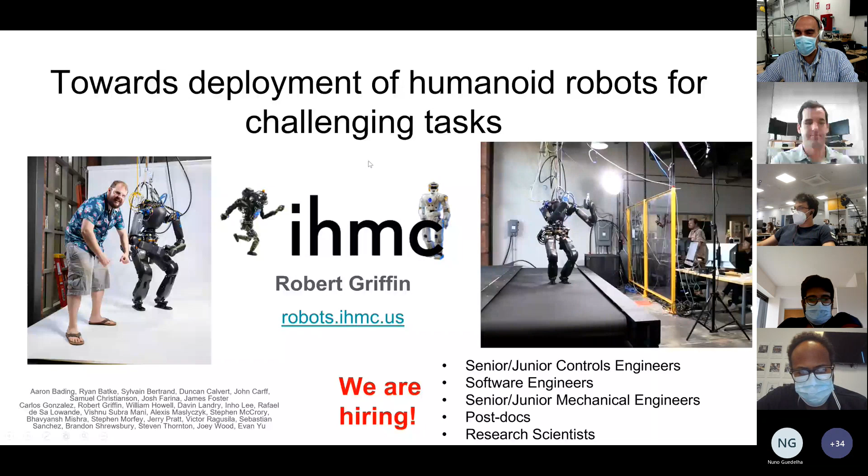Yes, Victor, please. Hi, Robert. Hey Victor, how are you? I'm doing well, thanks. It was great to see the robot - really nice. After the meetings we had, seeing the robot moving like that is awesome.

It's a little curiosity regarding the ISA that you are replacing for the shin to reduce the inertia. You are still replacing hydraulic with hydraulic actuators, right? So you are, but now resizing because of the torques that you need for the ankle, and that's why you are gaining in inertia.

Yeah, so we're trying to reduce the inertia because one of the things we noticed was just with the hydraulics being both the physical size that the ISA is - it's really compact for what it is, incredibly power dense, as you all know. It's a really great piece of technology, but it only comes in one size, which is way bigger than we need for the ankles.

I know originally - and I feel like I'm preaching to the choir here - they were going to come out with two different sizes, and we were going to use the smaller size for the shin, but in this case they didn't. So we're pretty much just doing our own piston design. We're still going to use the same valve for the time being, but doing a custom piston, putting the load cell in line with the pressure sensors and an encoder directly in there. We have it on a bench top right now, and it seems to be working fairly well, which is great.

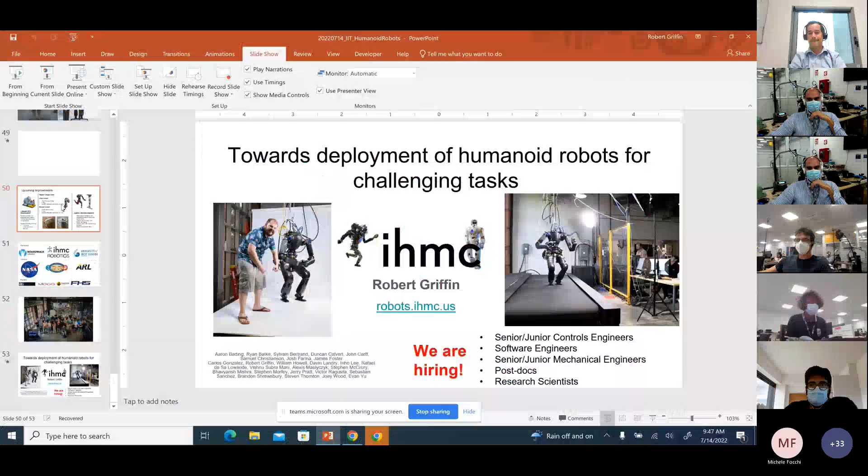Yeah, let me see if I can go back here. So right now, as you said, we're just using this Takako axial piston pump. I think we're kind of coupling that with a Halodi motor or frameless motor right now. We're not 100% set on the motor itself, but we managed to pull the flow rate requirements and model the flow rate pretty accurately. And then we can run our simulations to figure out how fast we want to go so that we can calculate the flow needs of the different actuators. The one thing that doesn't take into account is the leakage, which is not great.

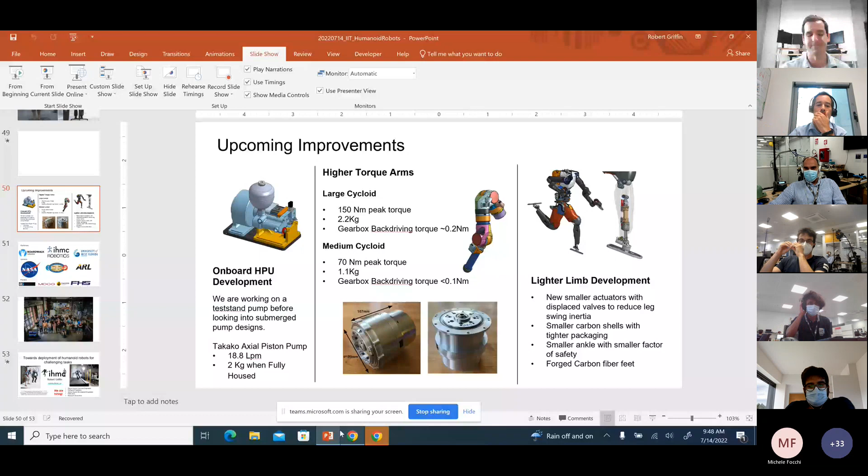And then I think that, from our modeling, we're probably going to have to submerge the motor in order to have it operate at a high enough voltage in order to actually be able to run it quickly enough. But I think it should be good. Right now, we're still in the preliminary design phases, just testing out driving the motor and the actual pump itself, but really pulling the Takako pump and redesigning the housing and everything.

We should catch up about HPU soon, because we're also developing our own submerged HPU. I think we can exchange some results. For sure, that'd be great. I think I remember you saying that at ICRA, so that'll be exciting. I need to close the loop with the rest of the team.

That's great. I think now Aditya, if you want to ask a question. Yeah, actually, I hope I'm audible now. Yes, a little bit of noise in the background, but it's okay.

All right, Robert, thanks for the talk, it was super interesting. I had a question out of curiosity about the path planning you do here. How do you place the points, and how often do you build a tree? Do you build it on a periodic interval, or is it event driven? And also, why specifically the A-star algorithm?

Yeah, so there's two different algorithms running right now. There's the height map that's being built from the Ouster. Right now that's not running in a real-time updating loop, so we get an assumed goal that the robot plans towards from the beginning, and then you just hand the robot a path. One nice thing is a user can manually draw a path that you want the robot to take.